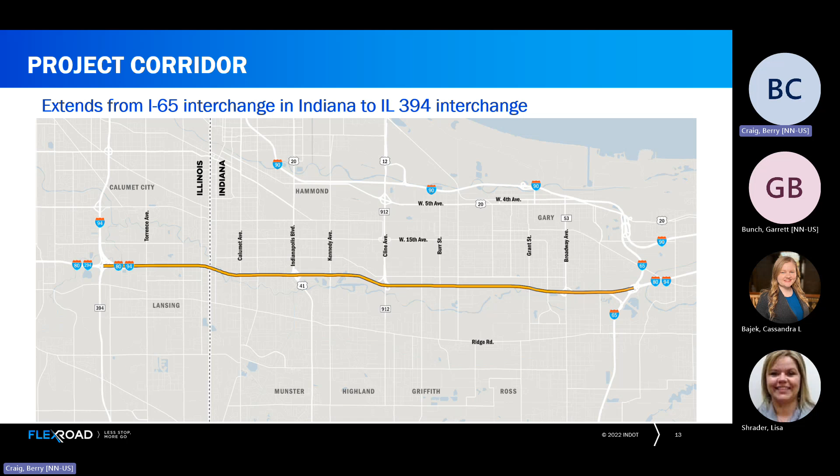This is a very busy corridor. In fact, it is the busiest interstate corridor in all of Indiana. We cover about 14 miles here, taking you from the I-65 interchange in Indiana, heading west to the 394 interchange in Illinois in Cook County. That is your project corridor.

Here's a snapshot of what you see on the Borman. This is a pretty typical image of what you can expect: a lot of congestion, a lot of vehicles using the Borman, and a lot of truck traffic. Every day around 160,000 vehicles rely on the Borman for their daily commutes.

Out of those 160,000 vehicles, about 30% of the traffic is truck traffic. So that's a big number.

In addition, Indiana is actually the state with the most traveled miles by trucks across the nation. So Indiana is leading the nation in truck traffic, and the Borman has certainly seen its fair share of that.

One other thing to point out in this snapshot of the Borman is not only what we have in place now, but some of the constraints we face because of the Borman and where we are in this process. The Borman was built back in the 50s.

It has been widened over the years, usually to about 4 to 5 lanes now. Not only that, but you will find development nudging right up beside the roadway, including commercial development and also homes, residential development.

So when you look at this corridor and consider possibilities that are reasonable and feasible, you must take into account what's in play here. When we started looking at solutions to improve the situation, we wanted to stay inside that existing footprint as much as possible.

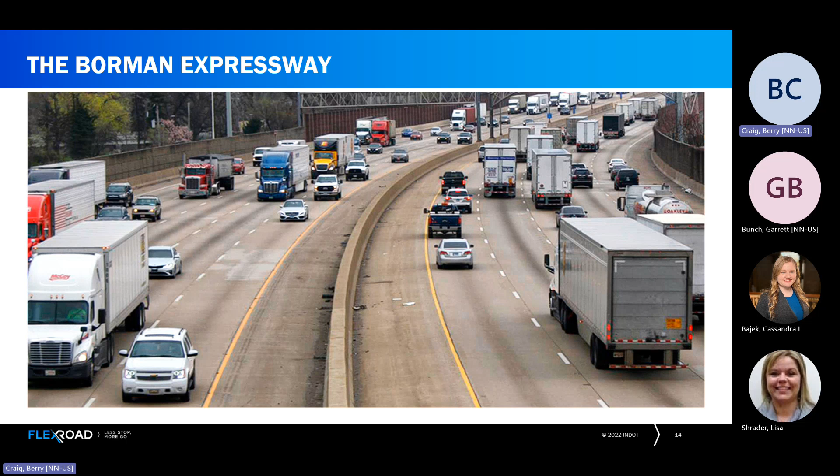Also, the impacts would be incredibly significant with the homes and businesses there. These are all considerations we needed to take into play, and we needed to make sure we were identifying reasonable and feasible options.

Purpose and need is very important for the project. Purpose and need is basically why you're doing this project. There are two big needs here for FlexRoad: the congestion I just talked about, which includes bottlenecking and low speeds, congestion and delays.

The other big one on this front, of course, is safety. We do have a lot of high crash rates along the corridor. So the purpose of the project is that we want to increase that efficiency.

Not only do we want to increase efficiency, we want to increase reliability. Having a more reliable system means drivers have a better understanding of what to expect when they use the Borman. Also very important here, and always a key focus for INDOT, is making sure we are improving safety.

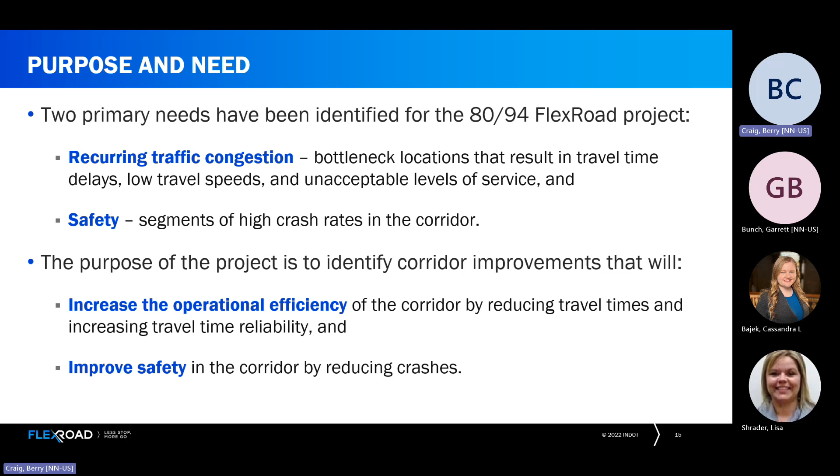Another thing I wanted to touch on briefly before I hand off to Toby to talk more about the improvements is the TSMO option — that transportation systems management and operations strategy. When I talked about how tight the Borman is, with development right there by the roadway, staying within the existing footprint really had us taking a look at these TSMO strategies.

We looked at a long list of those strategies to identify the best options that we thought would work well together to make the biggest difference on the Borman. That's where we are in the process.

We have several options that we think are going to make a real difference here, and Toby will be running through that list.

Finally, we wanted to talk about environmental impacts. It's always important when we talk about a project and improvements: what impacts are we talking about with any alternatives? The nice thing we can say here is that the impacts are fairly minimal with FlexRoad.

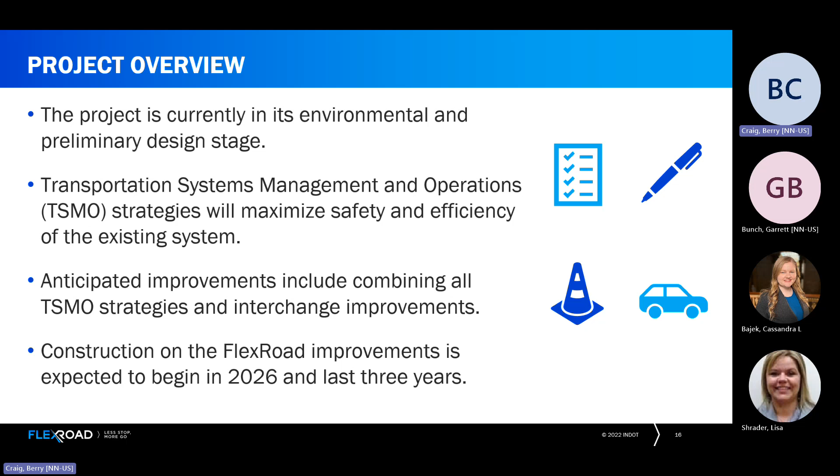Again, I would direct you to that draft environmental document housed on the project website. All of this information is listed in detail, so you can take a closer look at any area of interest you might have. And with that, we're going to get to more of the meat and potatoes of what's going on and turn things over to Toby.

I'm going to talk about the anticipated improvements along the corridor that Mindy mentioned. What we're doing is combining all the TSMO strategies, some pavement rehab, and some interchange modifications at 2 locations along the corridor to improve and meet the purpose and need of this project: improve safety and improve mobility.

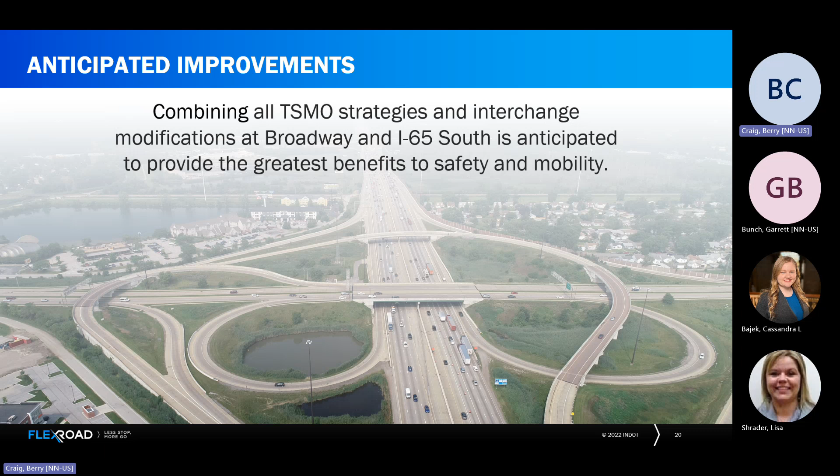So we narrowed it down to these 6 TSMO strategies that we're going to use along the corridor. You can see them here. I'll go through them individually.

The first one is ramp metering, which actually controls the frequency of vehicles coming onto the interstate. It looks for gaps in the mainline traffic and allows cars to get into those gaps and merge safely within the existing corridor.

Variable speed limits can be adjusted in real time along the corridor. When there's an issue or congestion, the speed can be slowed down well in advance to make the queues flush out much better than if they weren't there.

Dynamic lane control will be able to open and close any of the lanes within the corridor when there's an incident.

Dynamic shoulder lanes is the one added capacity aspect of the job. We are going to convert the inside shoulder into a dynamic shoulder lane, used during peak hours of the day, turned off other times and during certain weather events. So that's going to be great and add that capacity of one lane without widening the roadway.

Incident management strategies are still being considered and looked at. How do you get incidents off the road and out of the way quicker and safer? Those things are being considered, but not yet figured out.

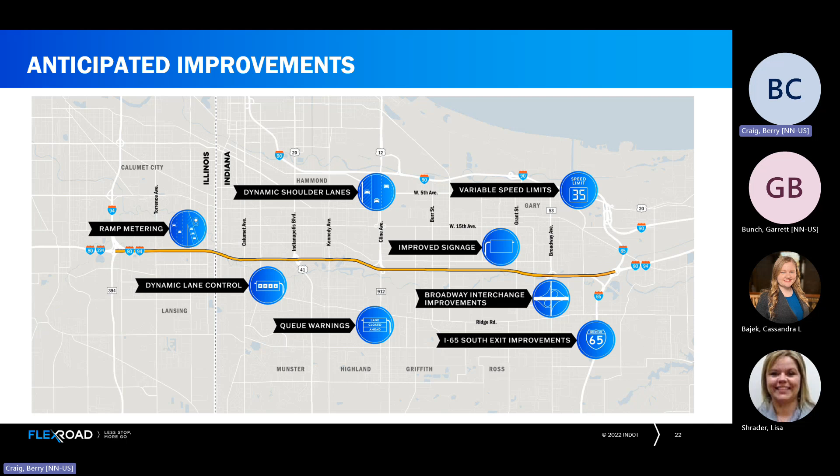Looking at the gantries, these are placed about every half mile within the area. This gives real-time updates to the drivers, and this is just a sample or mock-up of what this gantry may look like. It's a lot larger than a normal DMS message sign, with a lot more flexibility.

As you can see, we have the X's and arrows pointing to the lanes being open and closed. We can portray the speed limits, exit onlys, queue messages, or any kind of message we need at the top of it as well. Another look at that—this is just an example where we have an incident on the right.

We need to close those lanes, and we're running the dynamic shoulder lane on the inside to get traffic around these areas. And then you see it telling them 2 miles ahead, well in advance of what's happening ahead within the corridor.

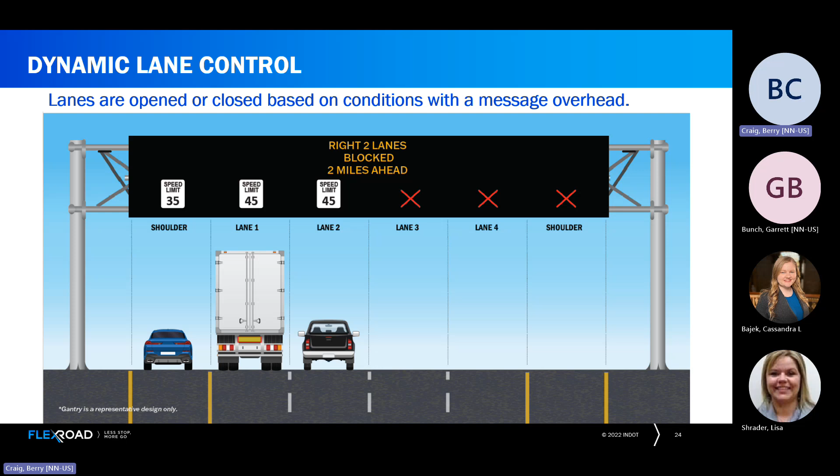What we're going to do is extend that lane and continue it through Broadway all the way to I-65. So you're adding a little bit of capacity from Grant on, with a little bit of widening. But when we do that, we need to adjust some of the ramps at Broadway.

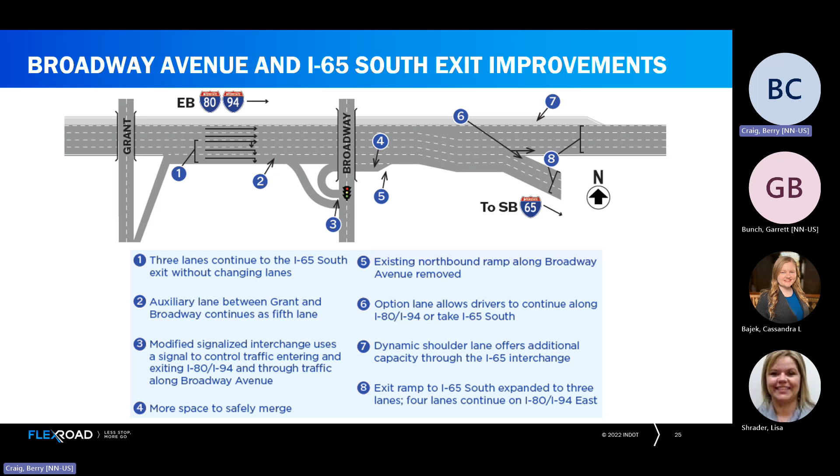Looking a little closer at Broadway, we're going to remove the existing northbound entrance ramp to eastbound, and combine that with the existing loop ramp. Both movements from Broadway will get on the interstate at that loop ramp location, providing a much longer acceleration distance and safer merging onto the roadway.

And that also allowed us to get that 5th lane through the whole interchange that was coming from Grant.

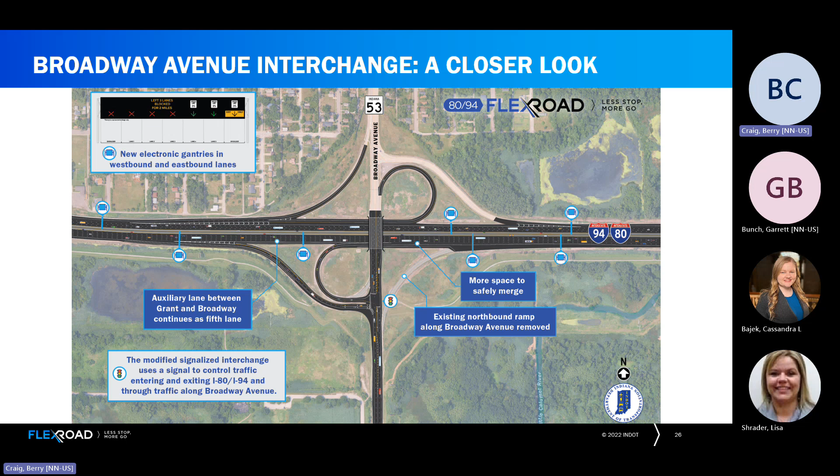So we continue widening to the east, and it goes all the way to the I-65 southbound exit. Right now that's only 2 lanes, and we're going to make that 3 lanes. Even the 3rd lane in the middle is going to be an option lane, so it's one of the through lanes you can continue on, or you can exit and be that 3rd lane on I-65.

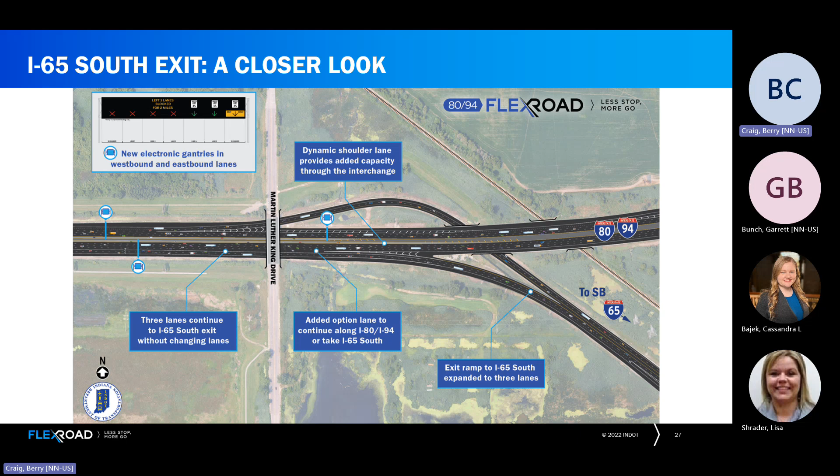We're also going to continue the dynamic shoulder lane through this area as well, so we're maximizing the number of lanes through here to help with congestion and safety. Some of the blue dots are the gantries going up, which will give messages throughout the corridor. So what we've done is broken up this job into 2 buildable units.

Replacing those cables provides redundancy so we have two main backbones — if one goes down, we have the other. It's a really good backup system for these signs that'll be telling traffic to do a lot of different things.

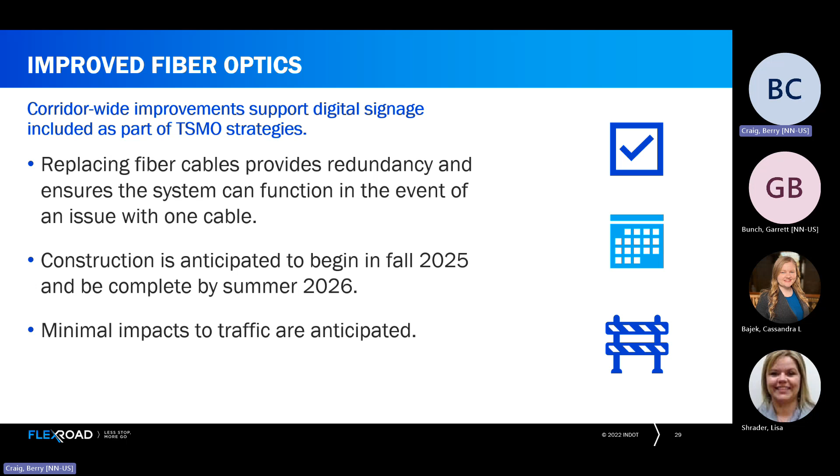This construction for the fiber optics is planned for fall 2025 and will go through summer of next year. It will have minimal impacts to traffic since it's all on the outside, with maybe some shoulder closures, but most traffic will not be impacted by this first buildable unit.

But when we get into the second buildable unit, which builds the concrete restoration, pavement, all the gantries, and everything else within the project, we are going to try to maintain 4 lanes in each direction on the Borman most of the time. We will do some down to 3 lanes in the middle of the night for overnight work, so those instances will occur as well.

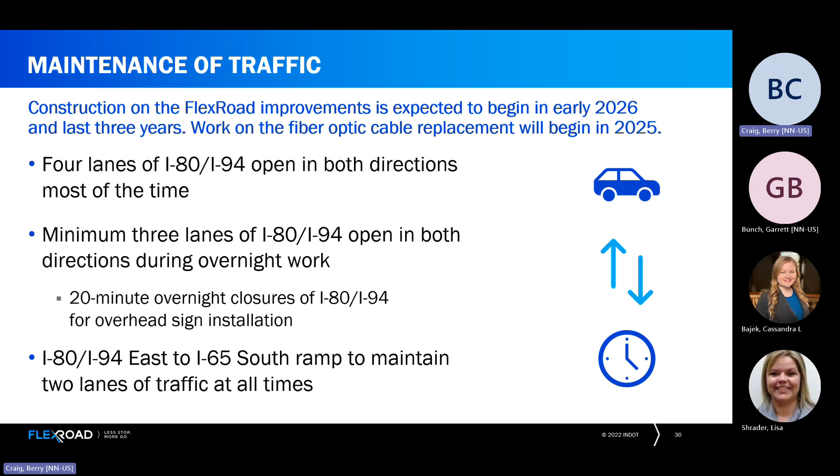And we will have some 20-minute closures. Those are typical on projects like this where we need to erect the overhead gantries and need all the traffic out from under it. So there will be some 20-minute closures, in the middle of the night, hopefully with minimal impact on the traffic and flow there.

We know the I-65 exit ramp is a big movement, so we are going to maintain 2 lanes of traffic on that — that's the existing configuration now — which should hopefully help with congestion during construction as well.

As you know, in this corridor there are a lot of ramps and interchanges, so we are going to do some strategic ramp closures. Not only are we doing pavement rehabilitation on ramps that will require closures, but also closing things that would otherwise bring in traffic and cause more capacity issues than expected during an MOT phase.

So there are going to be some short-term closures, and you'll see some exit ramps closed for longer. In addition, on some local roads where we're putting in conduit, we'll have boring machines doing that work, which will have some impact on local roads as well — shoulder closures and short-term lane closures anticipated for that fiber optic part.

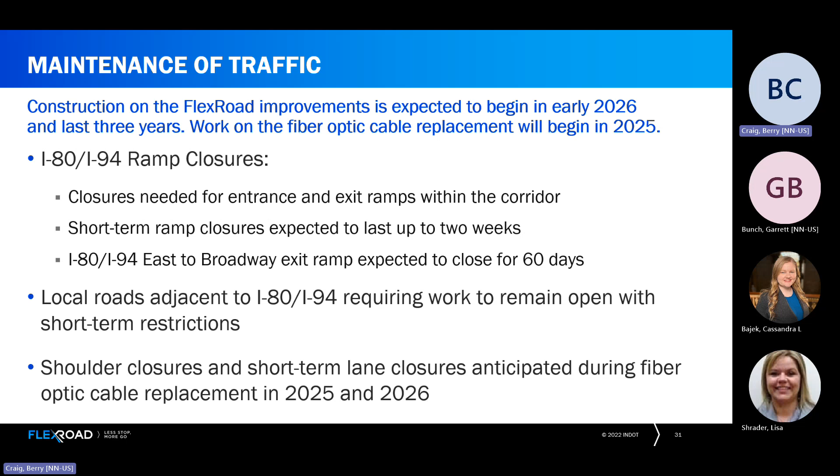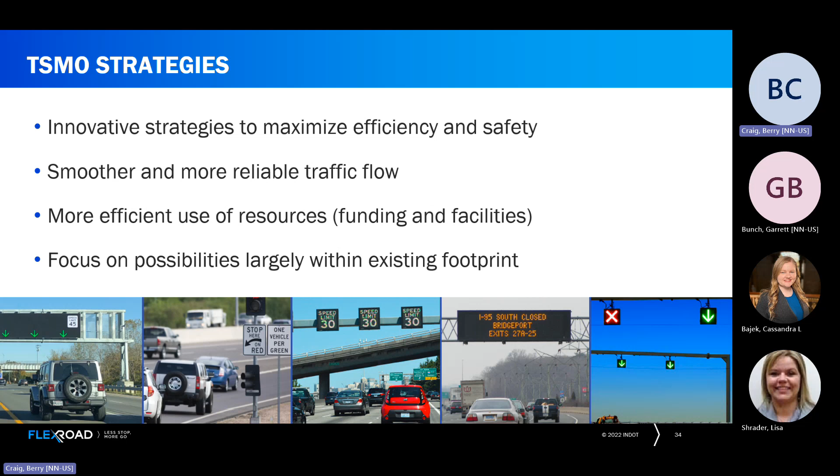Just this past year in Indianapolis, they started using ramp metering and variable speed limits. We are seeing the difference that's making in those spots where we have the variable speed limits in place, slowing down traffic to reflect what's actually going on with the roadway, whether that's a weather event, construction, or a crash.

We're slowing down traffic, and we are seeing that when we do that, hard braking that can lead to so many problems has already been reduced 60%. That's really going to have an impact on improving safety, because hard braking can lead to some real safety issues, and unfortunately it can lead to some crashes.

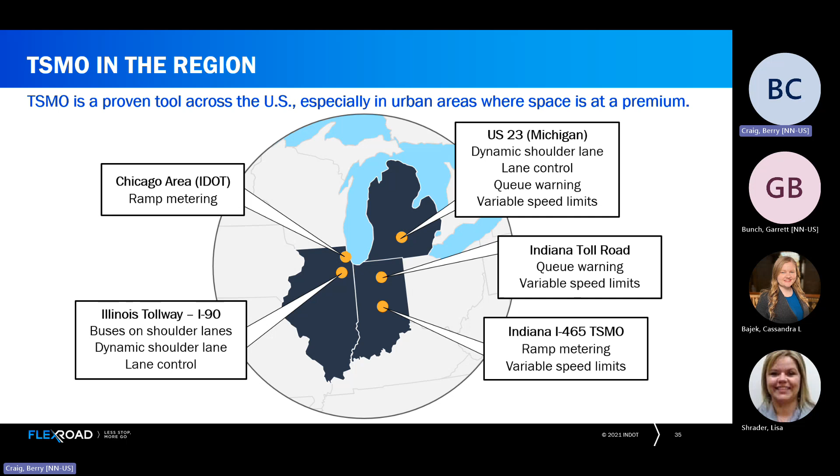Also, we have ramp metering in Chicago, so people who are in the area and driving through Chicago have likely seen that in play. And we'll talk more about that Michigan example in just a little bit.

One of the things we want to do is make sure, when we talk about new strategies, sometimes it's easy for people to be skeptical and wonder if they're really going to make a difference, especially when we do have some limitations on what we're able to do here. We do think by layering all of these strategies, it will make a difference.

We want to point to some examples where TSMO strategies have been in place for some years now and the difference they're making. Here in Minnesota, in the Twin Cities metro, they have ramp metering in place for over 210 miles, and they say every year that's saving drivers more than 2.5 million hours. A very big difference there, just by having that ramp metering in place and helping to control traffic entering the interstates and expressways when it's most appropriate, rather than having everybody try to cram in and get on at once and cause potential issues.

Also, you have a lot of savings with gas. And when you save gas, as well as saving on the economy there with the gas, you also have lower emissions, which can be a benefit.

Information is power, and drivers in South Dakota say they appreciate having a better idea of what to expect. We're using that overhead signage to share key messages, and that is affecting behavior. Drivers are taking notice, and most say they feel a lot better just having the information. They feel more prepared, they can plan accordingly, whether that's the timing of their trip, whether they decide to take another route, or maybe decide to exit earlier. And we already talked about the reduced emissions and the benefits there.